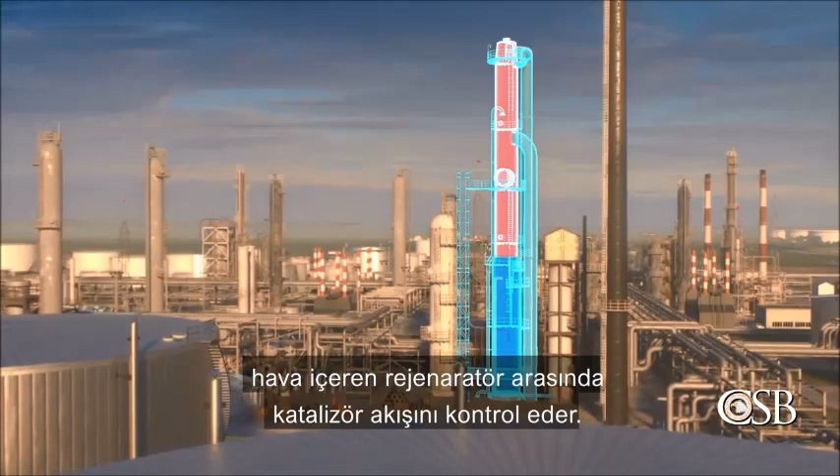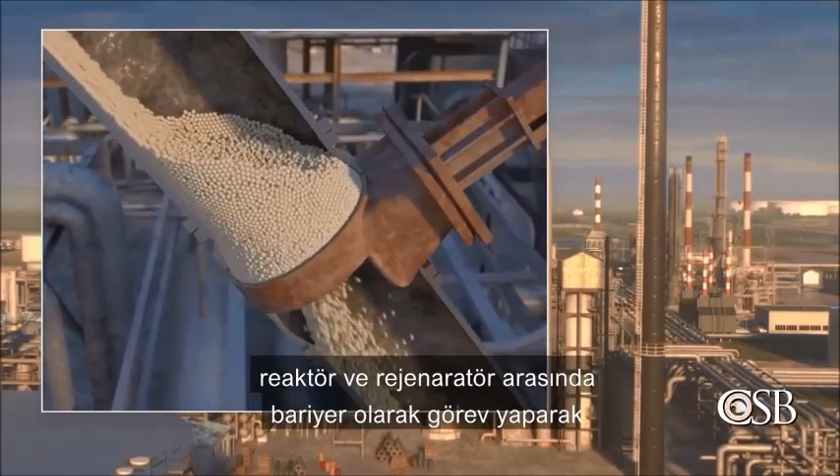The FCC unit uses heat and a solid catalyst to break or crack heavy hydrocarbons from crude oil into smaller hydrocarbons, which can then be blended into gasoline and other products. Slide valves control the flow of catalyst between a reactor, which contains flammable hydrocarbons, and a regenerator, which contains air. It is important to prevent mixing the hydrocarbons and air, since if they mix, a dangerous explosion can occur. To avoid this hazard, the slide valves maintain a catalyst level between the reactor and regenerator, which acts as a barrier.

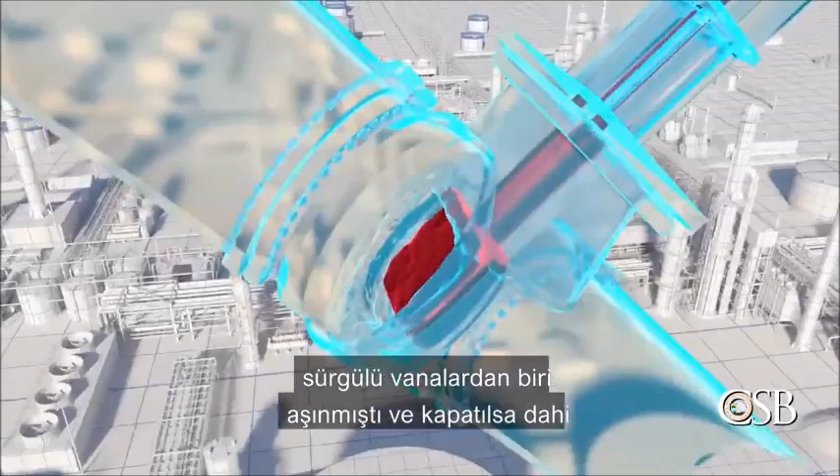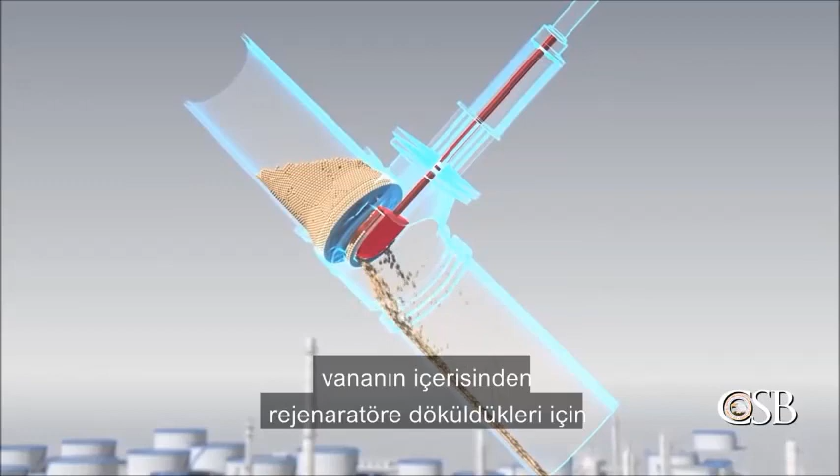To initiate the shutdown of the FCC unit, refinery workers stopped the flow of hydrocarbons to the unit and closed the two slide valves connecting the reactor to the regenerator. But unknown to the workers, one of those slide valves was eroded, and even though it closed, it could not maintain a catalyst barrier in the reactor. As a result, the catalyst from the reactor fell through the valve to the regenerator, leaving no protective barrier between the two pieces of equipment.

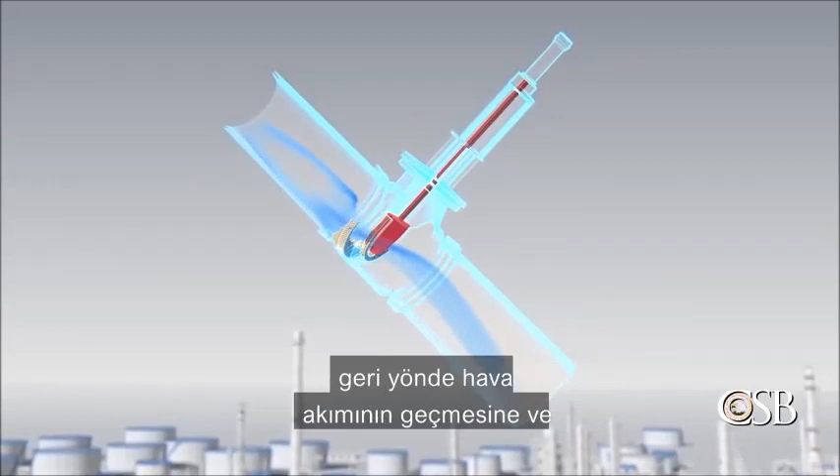This allowed air from the regenerator to flow backwards through the slide valve into the reactor, and then into equipment downstream of the reactor, which contained hydrocarbons, forming a flammable mixture. At approximately 10 a.m., the hazardous mixture of air and hydrocarbons found an ignition source, and there was a large explosion.

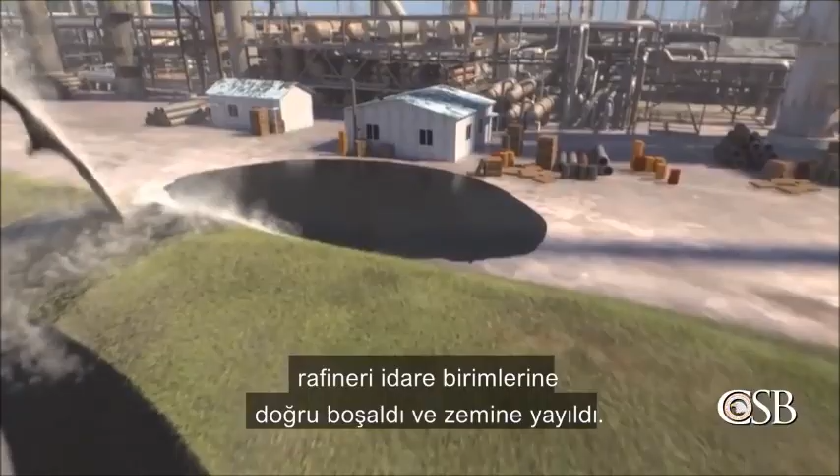Debris from the explosion flew about 200 feet and hit a large above-ground storage tank, puncturing the side of the tank and releasing hot asphalt. Asphalt poured out of the tank over the containment berm and into the refinery's operating units, where it spread along the ground. At around 12:15 p.m., the released asphalt ignited near the storage tanks, and a fire broke out.

The fire traveled along a stream of asphalt to the refinery's crude and FCC units. The fire produced a huge plume of black smoke, leading to the evacuation of a portion of the town of Superior. Typically, this type of asphalt fire can burn for days.

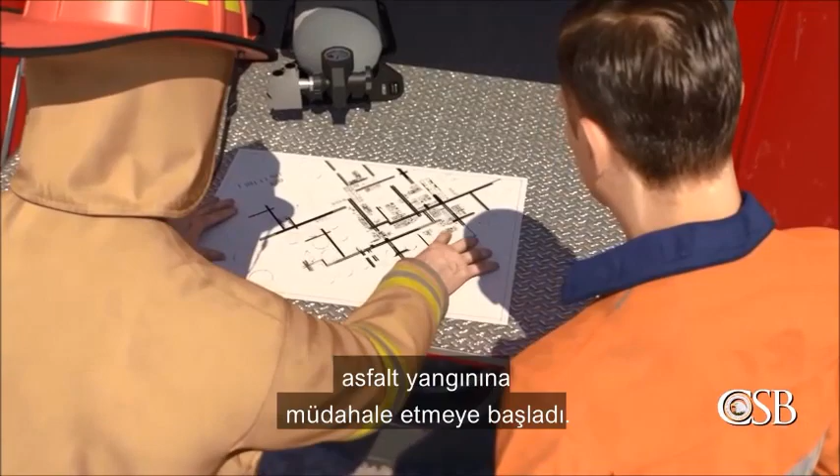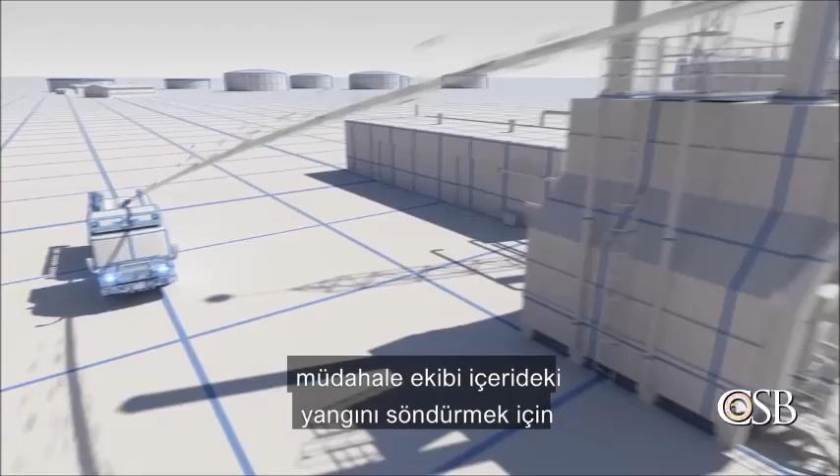A plan to extinguish the fire was developed by the refinery's emergency response team. Around 3 o'clock, they began to address the asphalt fire together with the Superior Fire Department. A fire truck drove to the edge of the crude unit, and emergency responders sprayed dry chemical fire extinguisher inside to fight the fires that had broken out there.

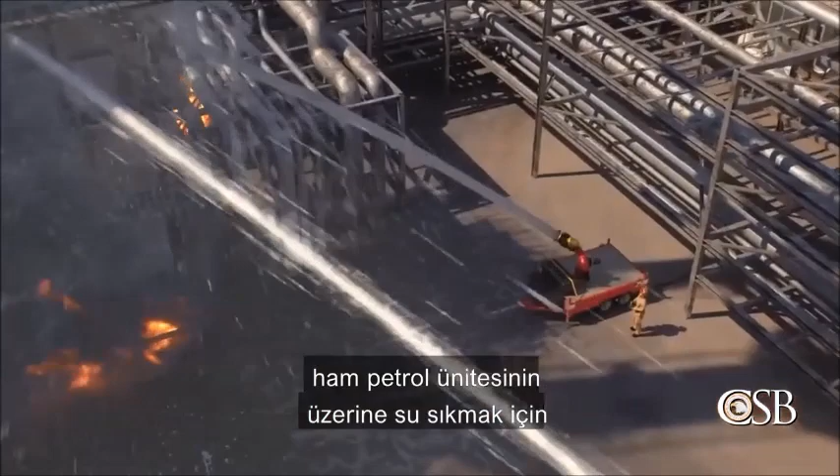Responders also used two stationary hoses called monitors to shoot water into the crude unit in an attempt to extinguish the flames. While these fires were being put out, over by the storage tanks, emergency responders began to approach the large area of burning asphalt.

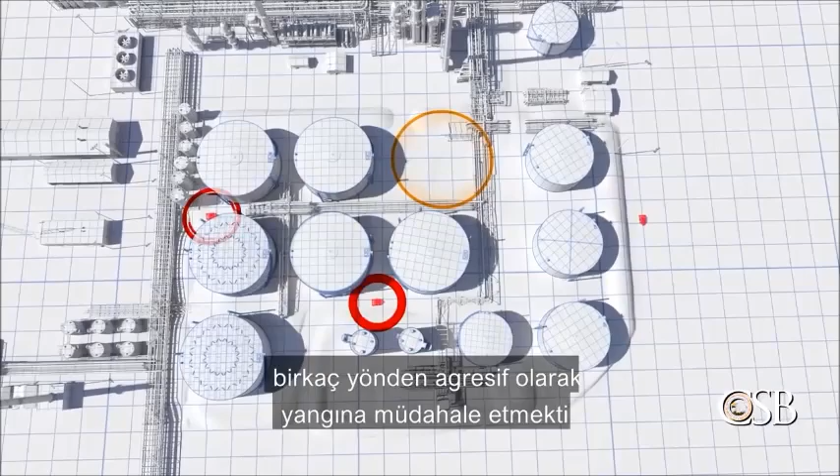The emergency responders' plan was to push the asphalt fire into an empty area near the storage tanks, and then aggressively attack the fire from multiple directions. First, they used two monitors, one to the north and another to the west, to sweep water to push the asphalt fire toward the designated containment area.

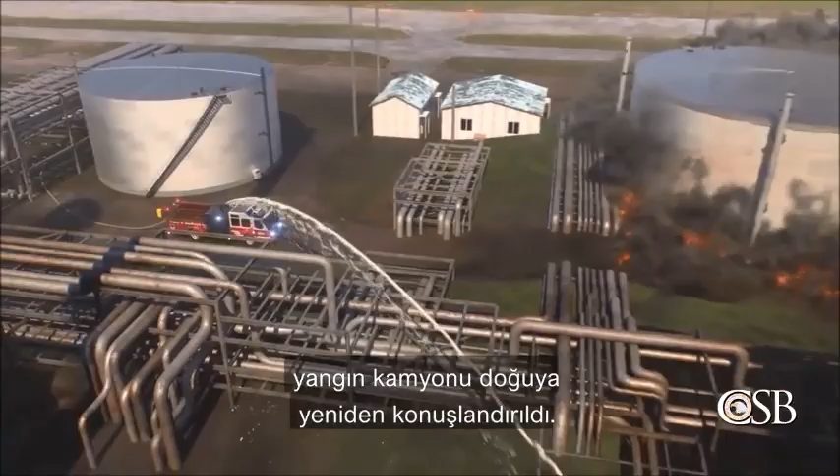Then, when the fires within the refinery's units had been extinguished, the fire truck relocated so that it could spray the burning asphalt in the containment area with foam from the east. Around 5:30, an additional team began to attack the fire from the south, spraying foam from a monitor. At this point, the asphalt fire was completely surrounded within the containment area.

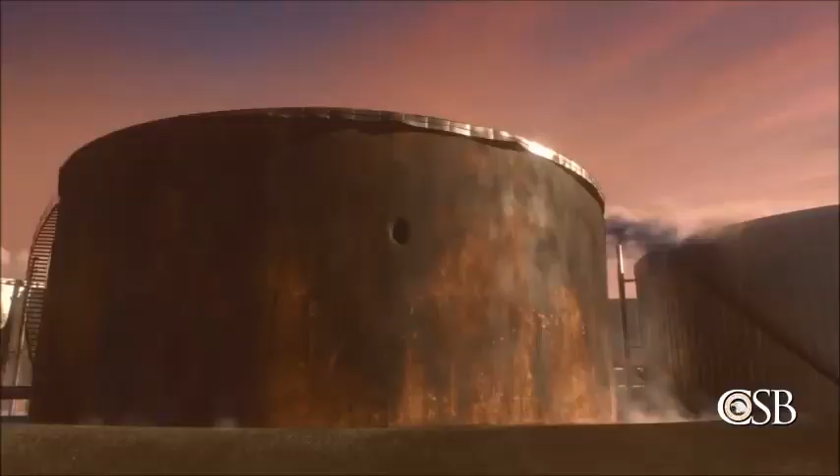With the fire contained, emergency responders were able to put out the asphalt fire at around 7 p.m. The asphalt fire had been extinguished in a matter of hours, as opposed to days, as had been initially feared. The evacuation order was lifted, and Superior residents were allowed to return home. Nevertheless, 36 Husky employees and contract workers sought medical attention for injuries.